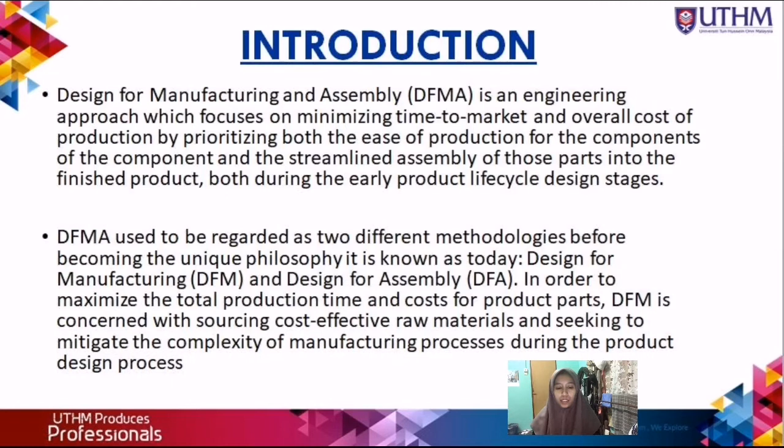DFMA used to be regarded as two different methodologies before becoming the unique philosophy it is known as today: Design for Manufacturing (DFM) and Design for Assembly (DFA). In order to maximize the total production time and cost, DFM is concerned with sourcing cost-effective raw materials and seeking to mitigate the complexity of the manufacturing process during the product design process.

There are a few aspects that are important to consider for DFM. First is planning. Planning is consulting the template with the expert of production. It is never better than at the design level to reduce the development cost.

Second is materials. When necessary, use manufacturing compliant materials to determine manufacturing procedure and means, management of materials, and quality control. Third is process.

Process is where you decrease the price by grasping the manufacturing process. For instance, instead of manufacturing several parts, 3D printing can make one monolithic part design.

Lastly is standards. Standards is where you use parts or elements that are common. While enhancing inventory control and time to market, it will reduce the expense of new design.

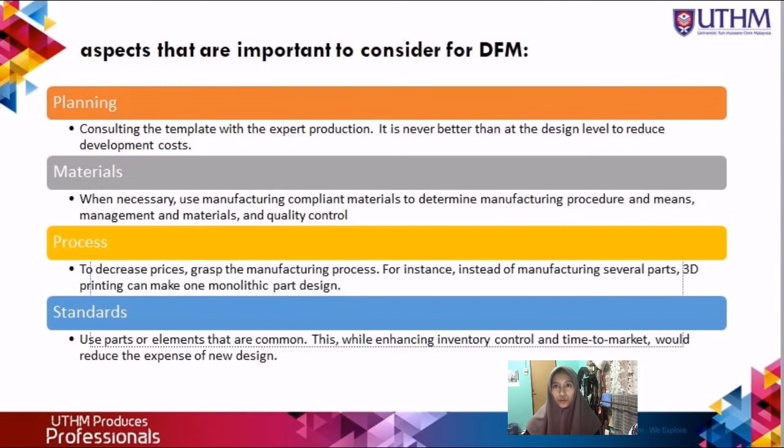Next is the background of the problem. For our project, the task given is to redesign a product so that the cost and time for the production of the product can be lowered maximally.

The product that we have chosen is the automatic rice cooker from the Panasonic company. The model type is SRGA421, manufactured by Panasonic Home Appliance in Thailand. The total number of parts is 19, and the number of screws used is 15.

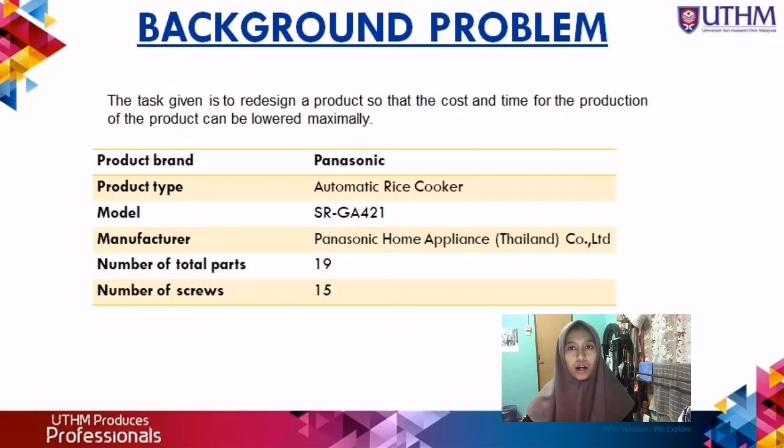Here are the objectives and scopes for this study. The objectives are first, to disassemble the rice cooker into singular parts for evaluation. Next is to evaluate the assembly efficiency of the original product using the manual DFA evaluation worksheet. Third is to compare the assembly efficiency between the original and redesigned product in terms of assembly time and assembly cost.

The scope of this study includes the software used for evaluation of the original product and the redesigned product, which is only the DFM and DFA software provided by the university. Second, there will be no prototype, as this study's redesigned product is only for theoretical purposes. Lastly, the evaluation process will be using the Boothroyd-Dewhurst evaluation worksheet.

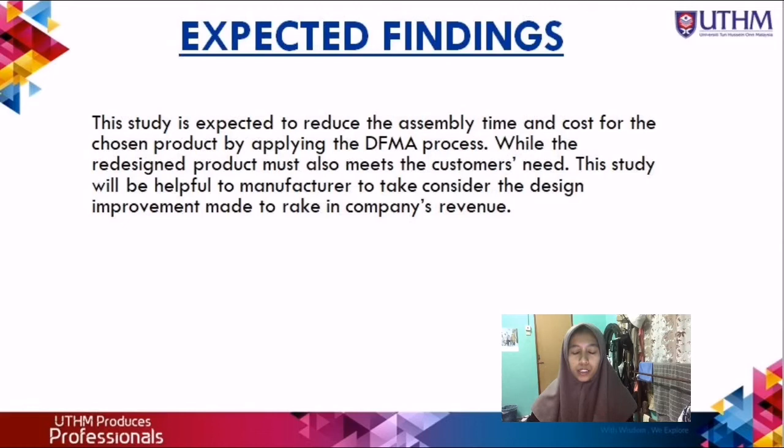For this project, it is expected to reduce the assembly time and cost for the chosen product by applying the DFMA process, while the redesigned product must also meet the customer's needs. This study will be helpful to the manufacturer to consider the design improvements made to increase the company's revenue.

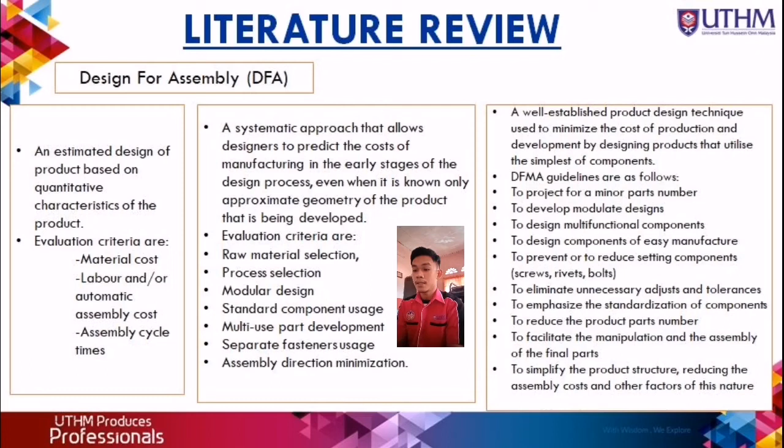to facilitate the manipulation and assembly of the final part, to simplify the product structure, reducing the assembly costs and other factors of this nature.

Next is a brief introduction of the rice cooker.

The electric rice cooker originated from military equipment used for cooking rice on a running truck. The principle of the cooker is that dielectric heat is produced by electric current passing between two electrodes set at opposite sides of the cooking tank.

In the automatic rice cooker, a thermostat located at the bottom of the cooker switches off the heater when the water is completely absorbed and the temperature begins to rise rapidly.

This is the figure of the main components of a conventional electric rice cooker that contains a

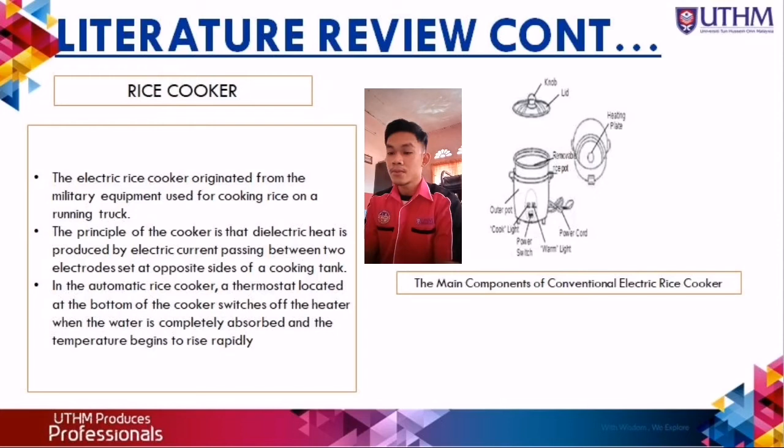lid, heating plate, removable rice pot, power cord, warm light, cook light, outer pot, and power switch.

Hi, my name is Sofia binti Zanali and I will be presenting on the methodology of this project.

So as for the introduction, in this chapter the flowchart of the project will be shown, and the perspective from this chapter is to see the process of the whole project for the rice cooker and design for manufacturing and assembly, the DFMA.

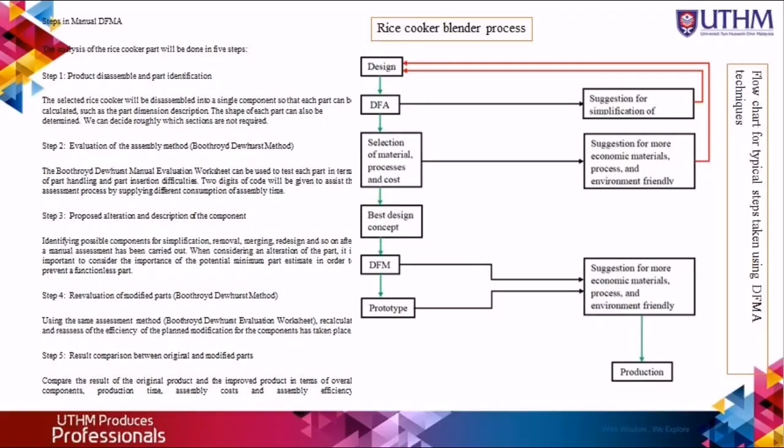I will continue the presentation with the steps in manual DFMA. The analysis of the rice cooker will be done in 5 steps. Step 1 is product disassembly and part identification.

The selected rice cooker will be disassembled into single components so that each part can be calculated, such as part dimension description. The shape of each part can also be determined from the process.

We can also decide roughly which sections are not required, so we can remove them and enhance the manufacturing process of the rice cooker.

Next is step number 2, which is evaluation of the assembly method, which is the Boothroyd-Dewhurst method.

The Boothroyd-Dewhurst manual evaluation worksheet can be used to test each part in terms of part handling and part insertion difficulties. Two-digit codes will be given to assist the assessment process by supplying different consumption of assembly time.

Step number 3 is proposed alteration and description of the component to enhance the manufacturing process of the rice cooker.

In this step, identifying possible components for simplification, removing, merging, redesigning, and so on, after a manual assessment has been carried out.

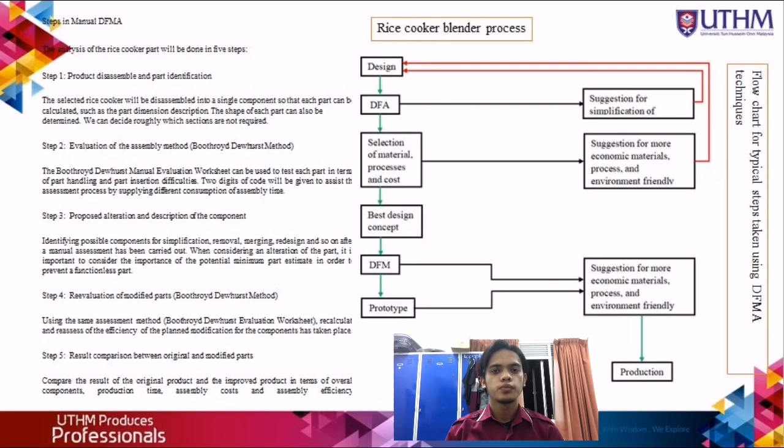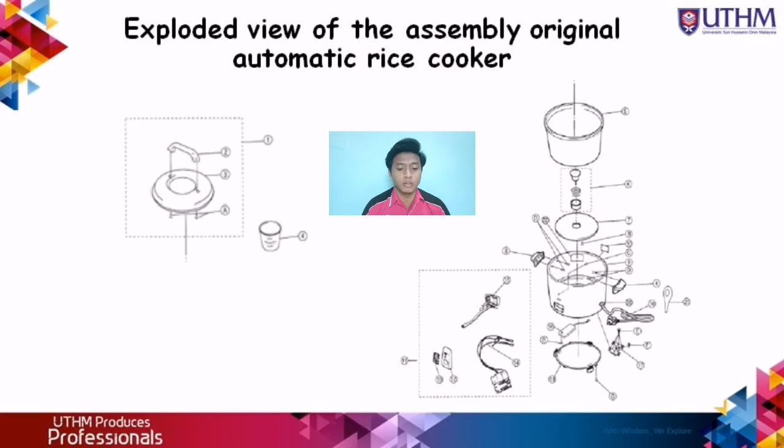We continue to the exploded view of the assembled original automatic rice cooker. This is the view of the rice cooker from the top to the bottom. We'll continue to the tree structure of the automatic rice cooker. The automatic rice cooker is divided into three main parts, which are the lid assembly, main body, and switch assembly. As we can see, this is about the parts in the main body of the automatic rice cooker.

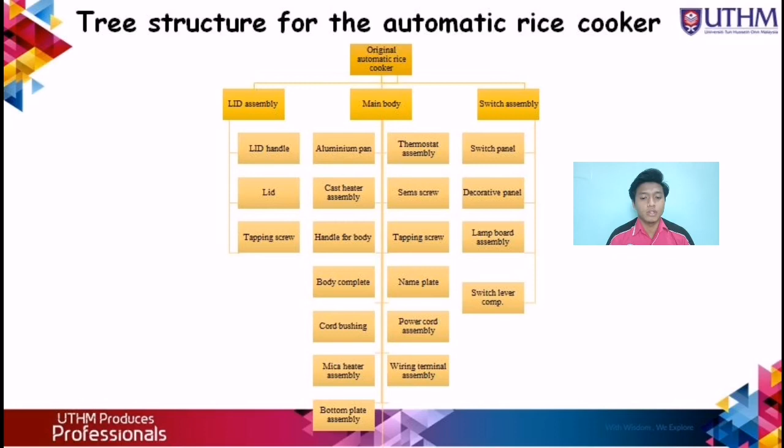Next is an example of the handling code and insertion code calculation. The example is the lid handle. For manual handling, alpha plus beta is equal to 540. The part is easy to grasp and manipulate, and the thickness is larger than 2mm. Therefore, the handling code is 20 and the estimated time is 1.5 seconds.

For manual insertion, this part is considered as part secured immediately. The part and associated tool can easily reach their desired location, with screw tightening immediately after insertion. It is easy to align and position with no torsion resistance. Therefore, the insertion code is 38 and the estimated time is 6 seconds. Hence, the total time is about 7.8 seconds, and the total cost is about RM 3.10 cents. The figure for theoretical minimum part estimation is about 1.

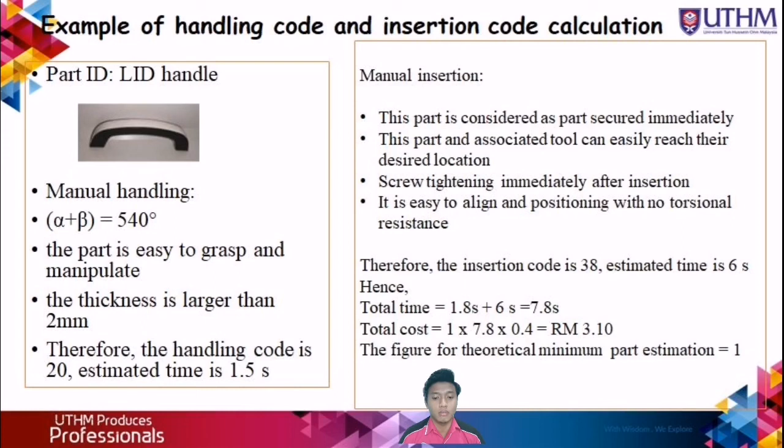So that's all from me. We will continue to the next chapter.

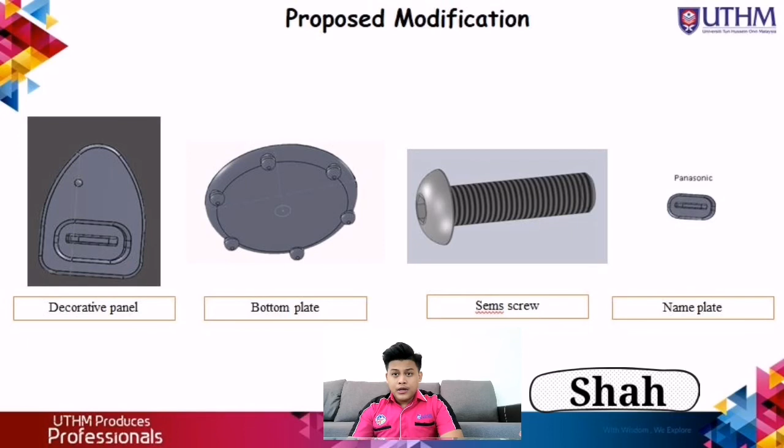I will explain about the proposed modification of the rice cooker. Proposed modification means we remove some parts that are unsuitable in the rice cooker to improve the design efficiency and increase the performance of the rice cooker. The first part that we remove is the decorative panel. For my suggestion, we can only use a sticker to make a decorative panel without making a specific part for the rice cooker to create the decorative panels.

It can reduce the cost of making the rice cooker. The second part is the bottom plate. The main body of the rice cooker and the bottom plate are separate. So in my suggestion, we can just add a stand at the bottom of the main body without making a specific bottom plate.

Secondly, the proposed modification is to remove the Sems screw. The rice cooker used two screws: the tapping screw and the Sems screw. In the proposed modification, we use only one screw, the tapping screw, because it's more practical and efficient compared to the Sems screw.

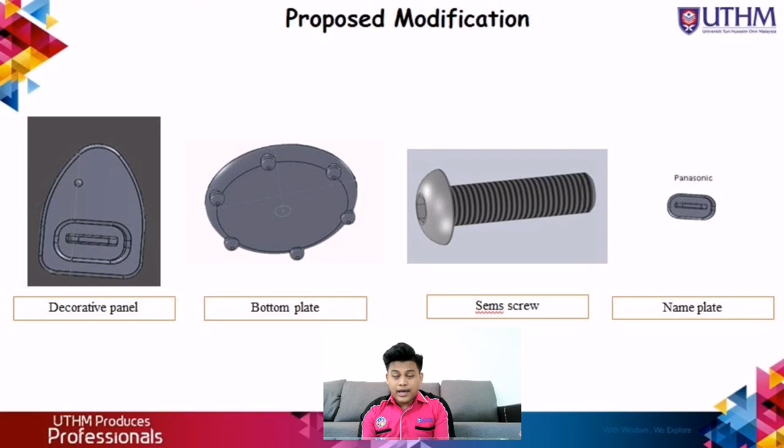The last part we remove is the nameplate. Same as the decorative panels, we can just make a sticker to edit our brand and add on the sticker, without making a specific part for the nameplate.

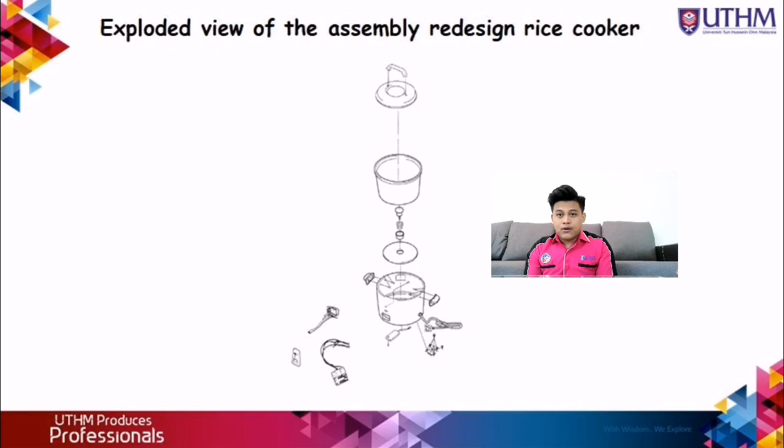This is the exploded view of the assembled redesign of the rice cooker after we remove some parts, which are the decorative panels, Sems screw, nameplate, and bottom plate.

So this is the overall conclusion of the project. Based on the analysis carried out, it can be concluded that the process of design for assembly is very useful for evaluating current automatic rice cooker design. This approach is also very helpful in maximizing production performance and operating costs for the product we want to evaluate. However, many changes and related fields within this analysis can be further explored.

This encompasses the concept of philosophy of other engineering practice studies too, especially in the field of mechanical engineering. During this coursework, the variety of engineering applications makes computer design an important subject to be learned. The strong communication between the group leaders, lecturers, and other students also made it possible for the group to complete the assignment on time. Ultimately, from the task given, we gained the knowledge to use engineering procedures to develop a new product. Therefore, the project's goals have been successfully accomplished.